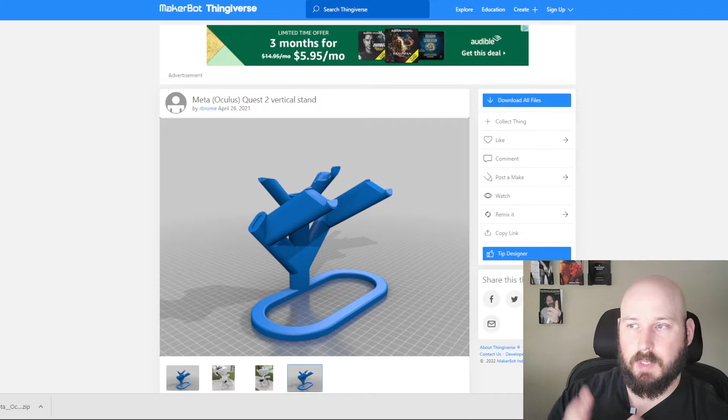All right, so right off the top, one of my favorite sites to go to is Thingiverse. Before I go into this, I want to make something very clear: if you're going into things like this, make sure you're doing this just as a hobby. You can contact the designer and ask if they're willing to give you rights to it. But for the most part, these are not royalty free - these are things you'd have to pay for if you want the rights to them, but they are all free if you just want to make something for yourself.

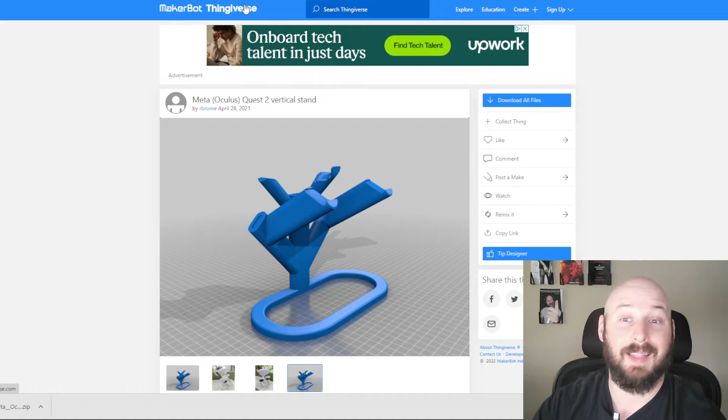So if you want to make, for example, a Quest 2 vertical stand, you just go to Thingiverse - I'll put the link in the show notes - and you'll be able to click on it and go to it. Then in the top search bar, just type in Oculus Quest. Yes, we all use Oculus Quest as a search term nowadays still, I don't know why. Anyway, go to Oculus Quest and then you can filter down through there on what you want. Once you've selected it, you can download a file, and once downloaded, you go into another program - I use Cura.

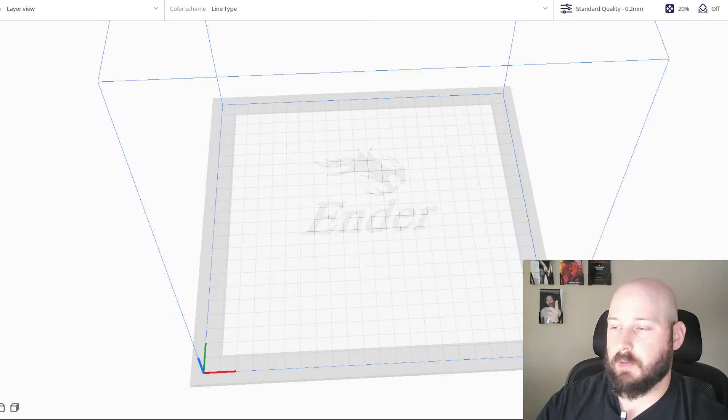You can use whatever program you want, and then put it into said program. Now it's showing up a little big, and I'm flying through a lot of this stuff because I'm not really showing you how to do this - I'm just showing you what you can do. So we're going to slice it, and then it's going to show the time.

Unfortunately my face is covering that portion of the screen, so I'll tell you - this item is going to take 10 hours and 59 minutes, 89 grams, which is 29.93 meters of filament, and it's going to cost about $2.68 if I paid $30 for a roll of filament. So that gives you an idea of what you can make.

That's just a regular stand. You can make things for your controllers, whatever you want, but that's just a regular stand - it takes about 11 hours. Again, that's a sketchy one, because if you go through that amount of time, you may or may not get it up. But if you have your machine tuned perfectly, that should be no problem.

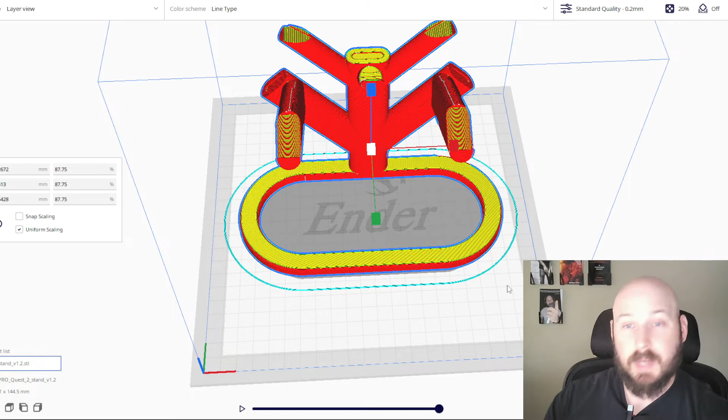So that is how you get your files. Let's go on to how to design a file.

Sorry you can't see my whole screen - I have some tabs for business that I can't show you. So to break it down, what I'm showing you right now is a very simple CAD software called Tinkercad. This is one of the ones I actually began using right off the bat.

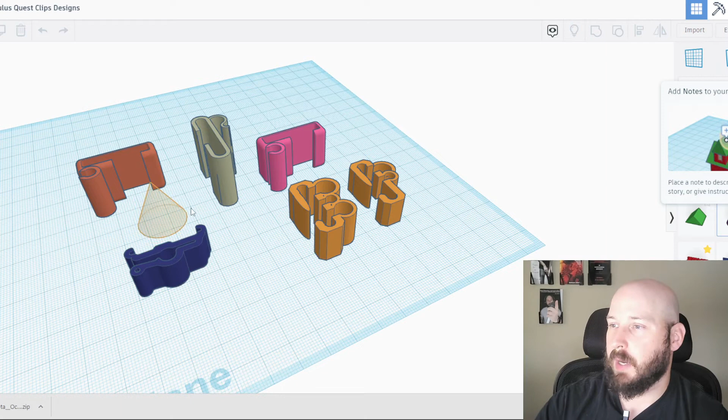It's very simple, literally drag and drop. You just put shapes onto here, and then you can manipulate the shapes into whatever you want. So before I get into it, I want to show how I designed one of my products from start to finish.

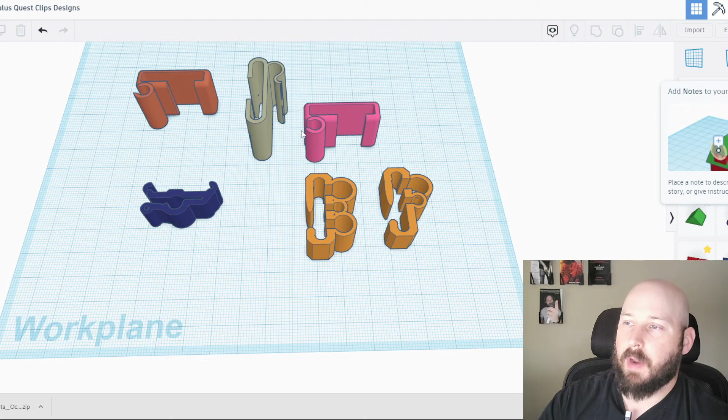So these are other people's designs here. What I found was a lot of these clips would break, or they didn't hold onto the actual headset hard enough, or they were having issues with the holes. So what I did was design my own, mainly by taking little circles here.

I'm not sure if you can see it - yeah, you can. Putting the circles wherever I wanted them, cutting them out, making other circles, adding in different shapes to make these parts here, and then cutting them out as I wanted. So it was a very simple process.

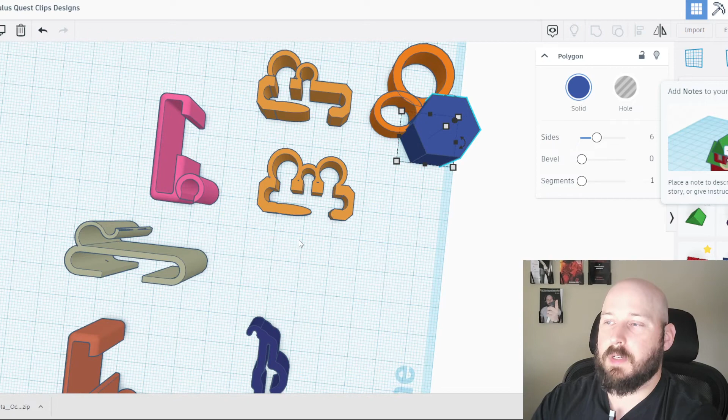I also had to worry about infill and everything else, which is the strength of the material we're creating for whatever product. If I'm creating something similar to this, I need to make sure it's strong, because if you're doing a lot of wear and tear and bending, you don't want them to break. So there was a lot of thought that went into how I was going to design a clip.

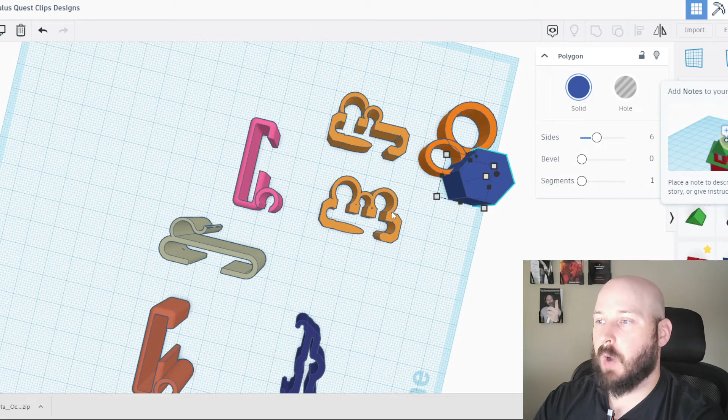That worked effectively for whatever environment these headsets are being used in. I wanted it to work in a very commercial environment, and you also have to worry about sizing, the clip size here. So I use a lot of little - I think I have one right here. I know I do, because this is my drawer.

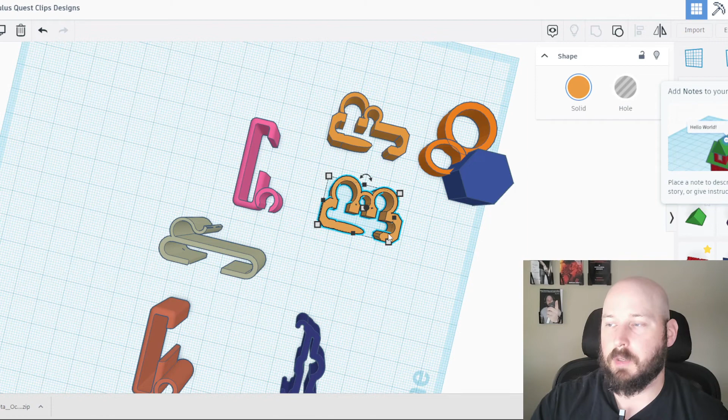So we use calipers, a lot of calipers - these things are all over the place here in my room. I'll check the sizing of everything to make sure it's accurate, and then I'll build it in. Everything usually works in millimeters, small size that I work in, and it gives you an idea of what you can do and manipulate to build whatever you want.

Now these are a little bit more complex, and you probably could do it in a 3D design like this, but I wouldn't recommend that. I'd recommend doing this in something different, say maybe Blender. And if I'm getting into Blender, I'm getting into more sophisticated tools that let you manipulate shapes and polygons to help you.

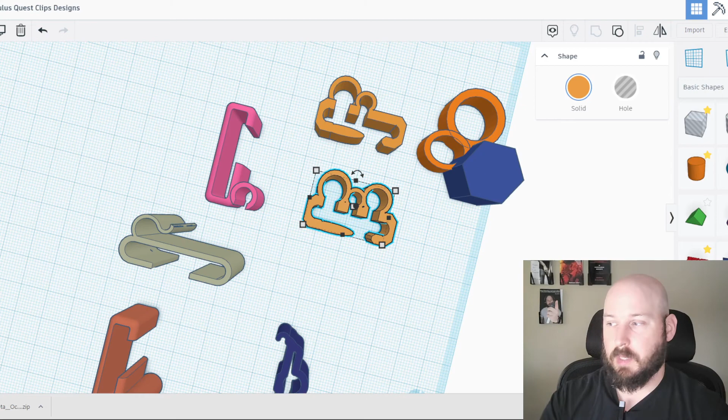So now I'm just going to show you quickly - we've taken the card, put it over here, brought it to one of the printers. We're going to go print from card, pick which one we want to print, click on that. Now we should edit the heat, which is here, and the table, which is here, but we're not going to do that right now. I'm just showing you exactly how it does.

So now that I've gone through how to do your own 3D printing, let me know what you think in the comments, and if it's something that's helped you. If not, again, you can support the people that you support on any of your VR accessories. But this might help if you just want stuff around the house, or you really want to start designing your own stuff.